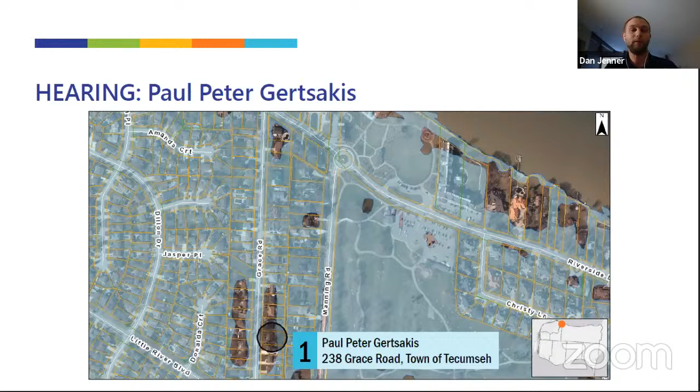So again, the first application is on Grace Road within the town of Tecumseh. It is a fully developed area. As this committee is aware, the town of Tecumseh has undertaken significant works along Riverside Drive to improve the flood resiliency of this area. They've also invested in updating their emergency plans as well as equipment to support those emergency plans.

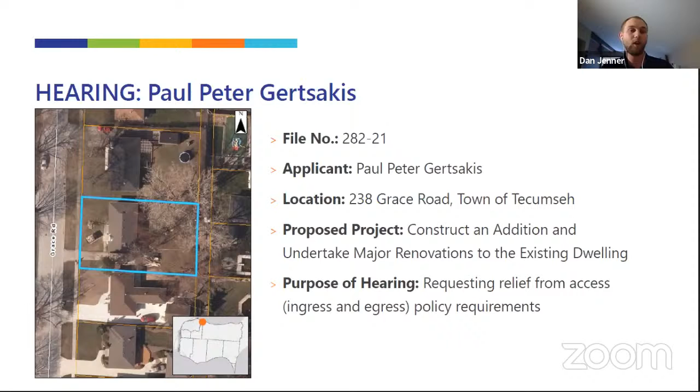So the applicant is proposing to construct an addition to an existing dwelling, and they will also be undertaking some major renovations, basically a full gut of the house and some exterior wall changes, as well as some basement windows. So they are seeking relief from the ingress and egress policy requirements. We're satisfying the floodproofing elevation, the minimum required floodproofing elevation of 176.7 meters.

Minimum road elevation here is 175.9 meters above sea level. For obvious reasons, setbacks from the hazards are not applicable for this particular site.

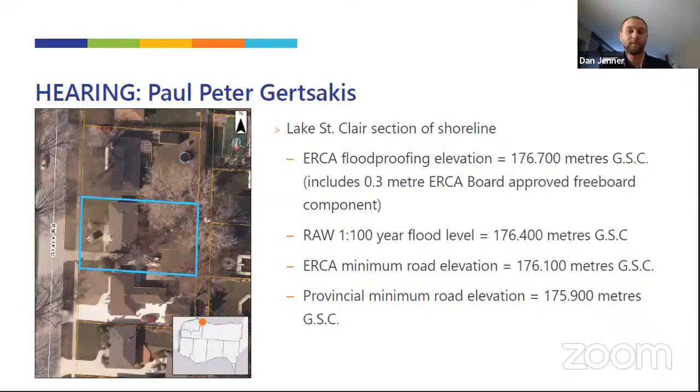Next slide, please. So you can see there on the map, there is a small portion that is approximately 5 inches below the typical provincial road elevations or minimum road elevations. But the town of Tecumseh is fully aware of this. The remainder of the access pathways out of this area are either between provincial and ERCA requirements or above ERCA requirements, as you can see from the green and yellow lines there.

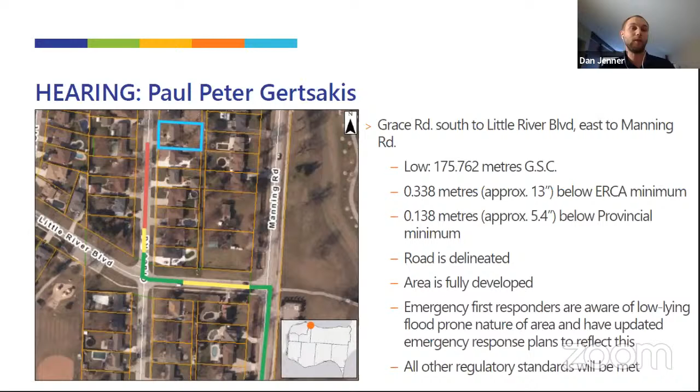Again, this area is fully developed. The roads are fully delineated. Emergency first responders are fully aware of the flood-prone nature of these areas, have updated their plans, purchased equipment, and we are satisfying all other regulatory requirements. Again, the applicant is fully aware of these potential hazards as well. So with that, we are recommending that the committee waive the ingress and egress policy requirements and approve the application for Paul Peter Gertsakis at 238 Grace Road in the town of Tecumseh.

Okay, thank you, Dan. Any questions from the board members? No? Then I need a mover to support the application from Paul Peter Gertsakis to request relief and approve the application. Moved by Deputy Mayor Bichetti, seconded by Len Janice. Anybody opposed? That is carried.

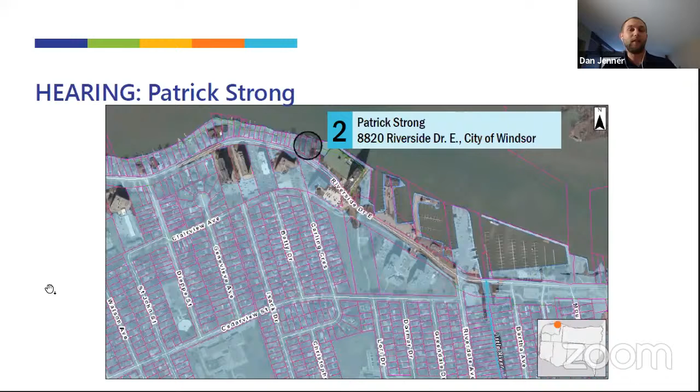The next application is from Patrick Strong. You may go ahead, Dan, with that one. Thank you, Madam Chair. The second application before the committee tonight, which will pop up on the screen momentarily, is located on Riverside Drive within the city of Windsor. The applicant, Patrick Strong, is proposing to construct a sunroom on the lakeside of the existing dwelling unit.

I want to clarify, this is a fairly extensive sunroom. It is essentially an addition. It can be used for 4 seasons, and it is going closer to the hazard. So anytime an applicant is moving the structure closer to the hazard, we as staff have to ensure that they're satisfying all of the current development requirements. In this case, that is the floodproofing elevation, which they are satisfying. We are satisfying the setback requirements from the hazard, ensuring that the new development is protected to that 100-year standard, and they've done that through a shoreline engineering assessment completed by Challenge Consulting Engineers.

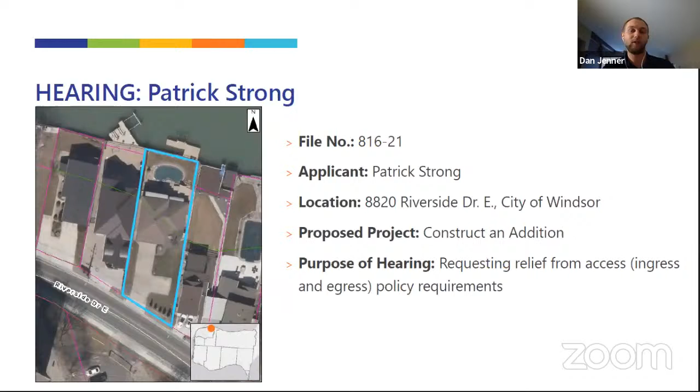The third requirement that we have to satisfy is, of course, the road component. The minimum road elevations here for ERCA is 175.8 meters above sea level, with the provincial minimum road elevations being slightly below that.

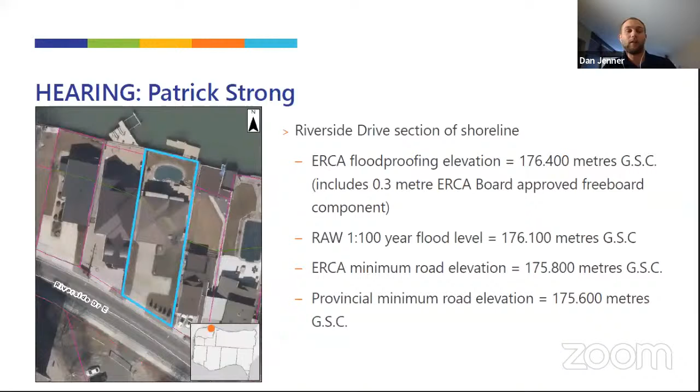Riverside Drive has recently undergone a reconstruction, so there have been changes along the roadway to improve flood conditions, not only for the south and inland areas of the city of Windsor, but also to allow water to move along the road better. Areas where water is pooling will now flow slightly along the road so it can get out of the area faster.

This is really important because emergency first responders can take this into consideration when deciding how to access an area, whether coming in from the south along other roads, or following Riverside Drive all the way along.

There are only two portions of the roadway below the provincial minimum typical road elevations, by approximately 4 inches. We are below ERCA's typical minimum road elevations by approximately 1 foot.

Again, this area is fully developed, and emergency first responders are fully aware of it. As a result of some of these road changes, we're bringing these applications to the committee for consideration with full support from staff, as we continue to work with the city on addressing these complex issues that face our region due to its very flat nature.

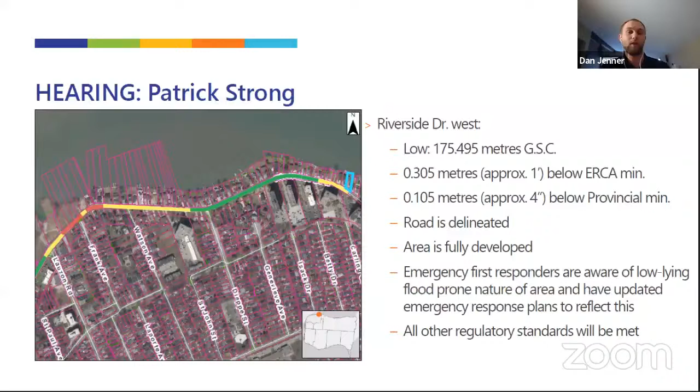So we are satisfying setback requirements, floodproofing, and with the committee's approval tonight, we will be satisfying those safe access policy requirements. Staff is recommending approval of this application from Patrick Strong, requesting relief from the access, ingress, and egress policy requirements to construct an addition at 8820 Riverside Drive within the city of Windsor.

Thank you, Mr. Jenner. Any questions or comments from the board members?

So then the application for Patrick Strong be approved, moved by Deputy Mayor Verbeek, seconded by Councillor Janice. Anybody opposed? No, that is carried.

And the next application, Tosin Bello. Thank you, Madam Chair. Again, we are located within the city of Windsor along Riverside Drive, and if you look closely at the map, you'll notice we are about 3 houses to the west of the previous application before us. Tosin Bello is looking to construct a second dwelling unit within the city of Windsor.

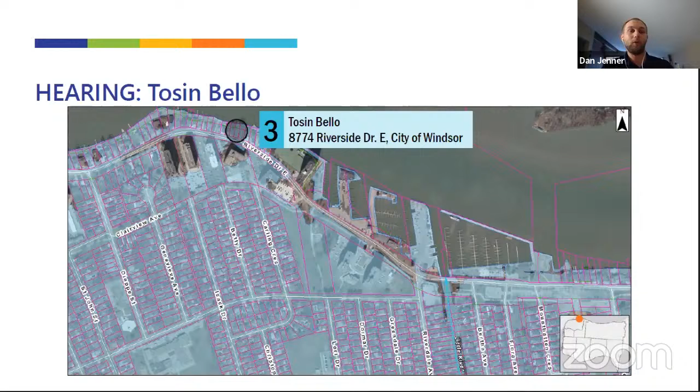Anytime we are increasing the number of dwelling units within a residential structure, we are looking to satisfy hazard management requirements, specifically setbacks from the hazard, the floodproofing elevation to ensure protection from flooding, and those safe access components. There is an existing house on this site, built around 2017, which did meet all requirements at the time.

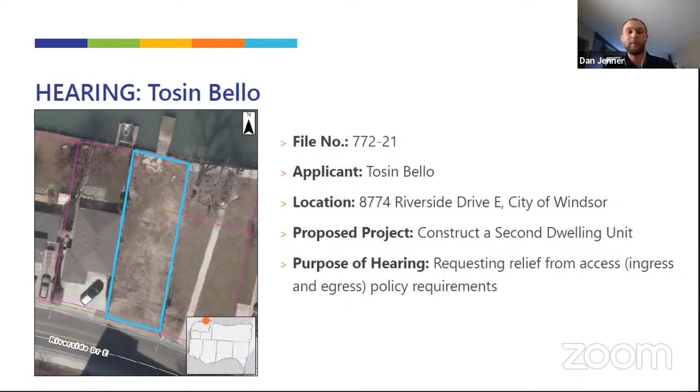We've since had some updated and more accurate road elevations, so we are bringing the second dwelling unit on this site before the committee tonight, seeking relief from those access, ingress, and egress policy requirements. The road elevation here is about 1 foot lower than the typical ERCA minimum requirements and about 4 inches below typical provincial requirements, so we're looking at around 0.4 to 0.5 of a meter of water over the roadway in the lowest spots of Riverside Drive.

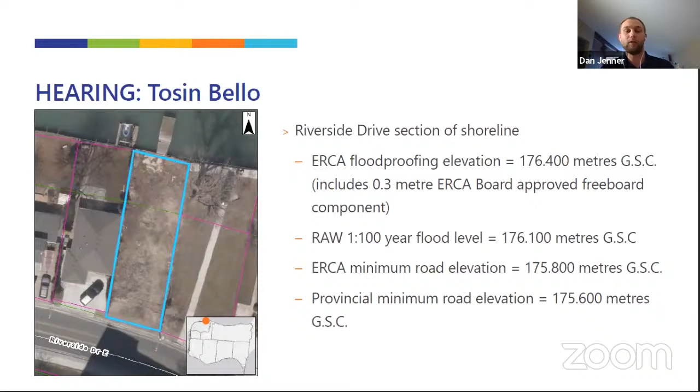Emergency services have updated their plans to reflect these areas and are fully aware of the flood-prone nature of them. The city has undertaken significant works on Riverside Drive to get water away from these areas as fast as possible, increasing their ability to respond and increasing flood protection for areas south of Riverside Drive. We are satisfying all of the regulatory minimum requirements.

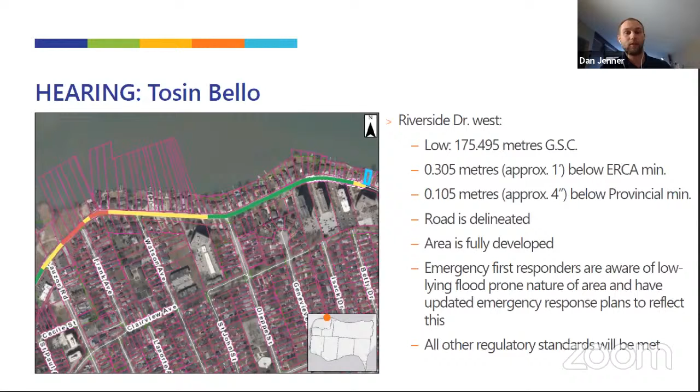Staff members are requesting that the committee give consideration to approving the application and waiving the ingress and egress policy requirements to allow for construction of the second dwelling unit at 8774 Riverside Drive in the city of Windsor.

Any questions or comments from board members?

Then on the application for Tosin Bello, moved to approve by Deputy Mayor Joe Bachetti, seconded by Councillor Janice. Anybody opposed? That's carried.